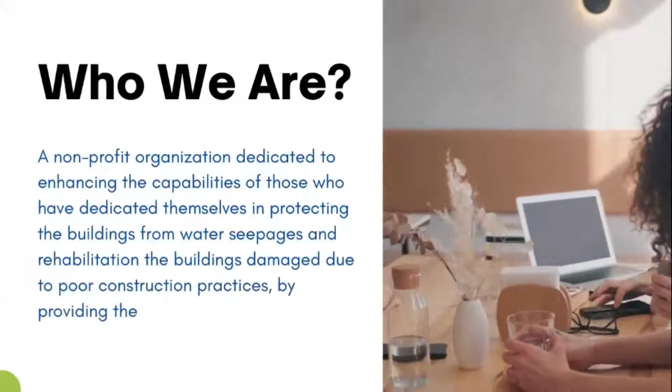Presenting to you all, Waterproofers Association of India. Introducing Waterproofers Association of India. We are a non-profit organization dedicated to enhancing the capabilities of those who have dedicated themselves in protecting the buildings from water seepages and rehabilitating the buildings damaged due to poor construction practices, by providing them a unified voice in the construction industry. Our mission is to make a credible national organization made up of the country's leading waterproofing, concrete repair, and rehabilitation, allied contractors, manufacturers, importers, consultants, and others which shall elevate the industry to a level of recognition and respect for one and all. This in turn shall facilitate focused growth of our industry in the years ahead.

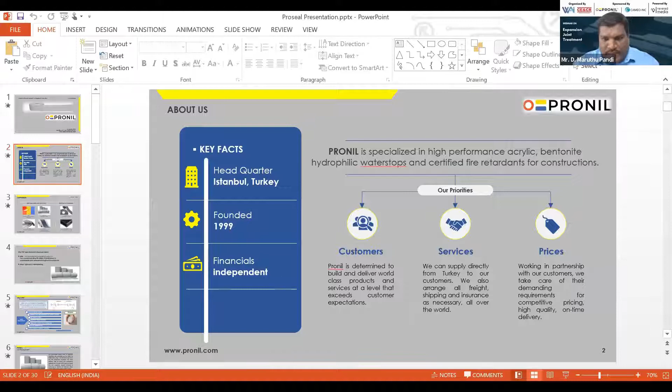Here you will see TPE pellets, which come in small pellets, and these pellets are converted into molten sheets in a machine to form the ProSeal expansion joint tapes. This tape is used in the expansion joint to accommodate movement as well as water tightness. I've taken a small piece and stretched it to a certain distance, so it prolongs and comes back to the original position. You can see here it was stretchable and comes to the original position to accommodate the movements.

It has good tear resistance, abrasion resistance, and resistance to lower and higher temperatures, colorability, and it is recyclable also. This TPE material has a high impact strength, is eco-friendly, resistant to very low temperatures, and possesses low compression. Low compression set means regaining the original position during expansion and contraction. It has excellent resistance to chemical and weathering. These are some of the very good properties involved in this TPE material.

Our product is called ProSeal. This is the product used in expansion joint systems, and it comes with perforations on the edges of the tapes. This acts as a better bonding with the adhesive systems.

Normally, the ideal adhesive used for fixing the expansion joint tape is epoxy adhesive or MS polymers. The perforations, the holes on the sides of the tapes, act as a rivet for the epoxy adhesive. For the first application, the second application will act as a rivet like that and have a better bonding on the substrate. It has a very good water pressure resistance of 5 bar, is very easy to apply on expansion joints, and is customizable according to customer requirements.

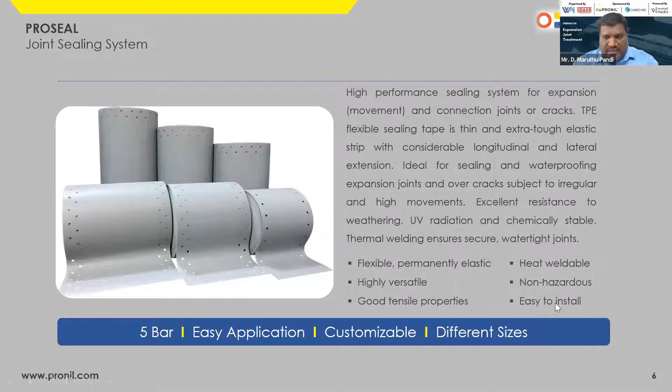There is a special treatment we do in manufacturing the ProSeal called plasma treatment. Plasma treatment is a surface treatment on these TPE tapes, done by machine. After a molten state, the surface of the tape is treated to have better bonding with the epoxy adhesive, forming a knurling texture phase. There should not be any dust, latents, or release agents or additives present. It should have a perfect, absolute bonding with the adhesive. This plasma treatment is required.

So plasma cleaning and activating the surface of the membrane gives better bonding with epoxy adhesives, other PU hybrid coatings, as well as MS polymers.

These are the technical properties of our expansion joint tape, TPE thermoplastic elastomer. The base chemical composition is a TPE-based elastomer, and the surface is knurling textured, which gives better bonding with other hybrid coatings, and it can be exposed to sunlight. It has a very good lateral and longitudinal strength of almost 4.7 to 4.8 MPa. Elongation is almost more than 500%, with very good tear resistance and a shore hardness of almost 70.

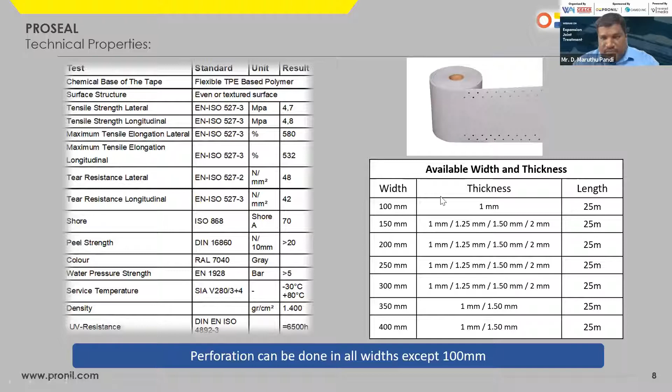We have various widths in the tape, like 100 mm, 150 mm, 200, 250 up until 400. Now we have started producing widths up to 700 mm also, with a thickness of 1 mm to 2 mm, and a length of 25 meters. We do perforations for all widths except the 100 mm. Perforation refers to the holes on the sides of the tape.

We have also done local testing with the Institute of Plastic Technology, which is a central government institute, and tested as per ASTM standards. It is certified by them, and this works well for Indian climatic conditions.

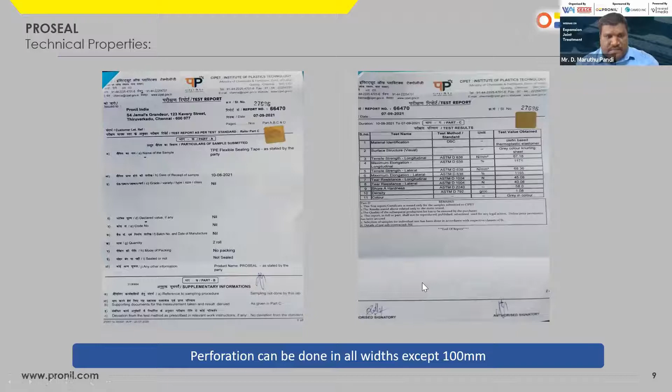We call it JSTO, joint sealing tape outdoor. ProSeal is an expansion joint tape product, available in plain as well as with a non-woven layer on both sides, like this. It's a TPE material of 70mm width with a total 120mm width including the non-woven on both sides, with a flexible zone at the center of 30mm. This is also customizable according to the required joint width - for 20mm or 25mm joints, we go with 120/70/30.

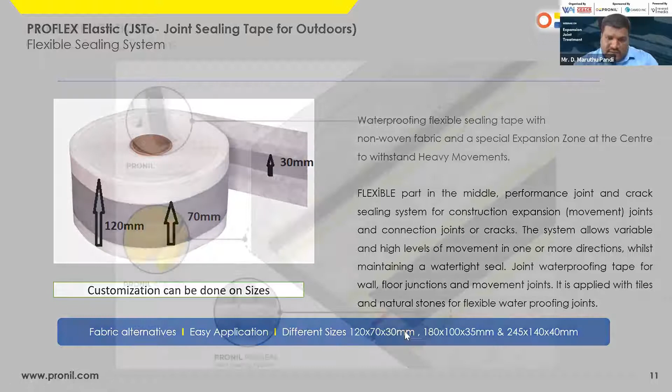If it's more than a 50mm joint, we go with a higher size of 180/100/35. The total width is 180, of which 100mm is the TPE coating and 35mm is the flexible zone. It also comes in a bigger size, 245 by 140 by 40mm.

This product, joint sealing tape outdoor, can also be used in some precast slabs, like precast movement slabs, where normally we put sealants like polysulfide or polyurethane. In those areas we can use these tapes to withstand movements and ensure water tightness.

For construction joints, normally we go with some acrylic swellable bars, and for sealing the construction joints exactly we can go with the TPE tapes.

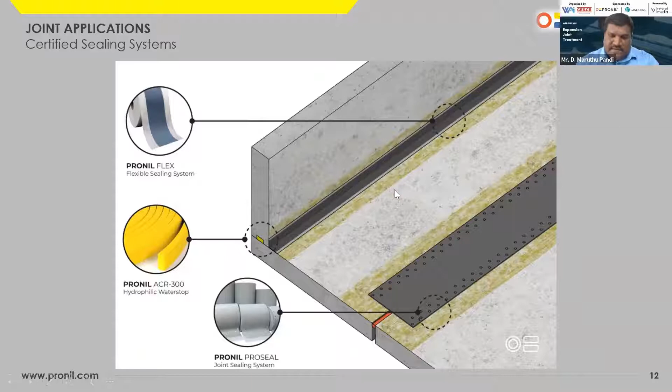This is also some of the USPs of the ProSeal tape. The product is used in combination with all construction systems - chemical resistance, UV resistant, very durable, European and Indian standard certified, with customer logo options which we do for some B2B companies. The drying time is also very fast once used with the epoxy adhesive, giving value addition and income stream.

I just want to explain - imagine an expansion joint of 20mm or 25mm. The selection of tape is very important. The tape selected has to be twice the width of the joint - that is mandatory. So if it's a 20 or 25mm joint, a 100mm tape has to be selected, or for a 50mm joint, a 150mm tape should be selected.

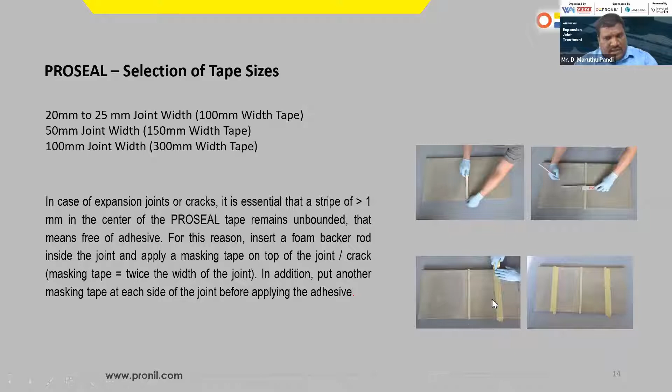So here's a small application process showing how to apply ProSeal. Here you can see the expansion joint was sealed with masking tape, so other material doesn't get into it. For a 20-25mm joint, we need a 100mm tape, so he will be putting masking tape before applying the epoxy adhesive.

Application methodology of ProSeal expansion joint tape on a horizontal area - imagine working on a podium slab, walkway, or pathway in a construction system. I'll show a small drawing. Consider a 50mm expansion joint in a podium slab where traffic or car parking will be present - for this 50mm joint, I'm selecting a 150mm tape.

This pink one represents the 150mm tape, which is fixed with epoxy adhesive. This epoxy adhesive has to be maintained at a thickness of 4mm on the substrate. Surface preparation, removing dust and laitance - all of this is mandatory for waterproofing applicators.

I'm just explaining how to fix the expansion joint tape onto the substrate. A 4mm epoxy adhesive layer is mandatory to fix the TPE tape, with a minimum of 20mm from the end of the tape to the concrete substrate. The first layer of epoxy adhesive should be 4mm, and then a second layer of 4mm should be applied, so it easily catches hold of the tape on the substrate.

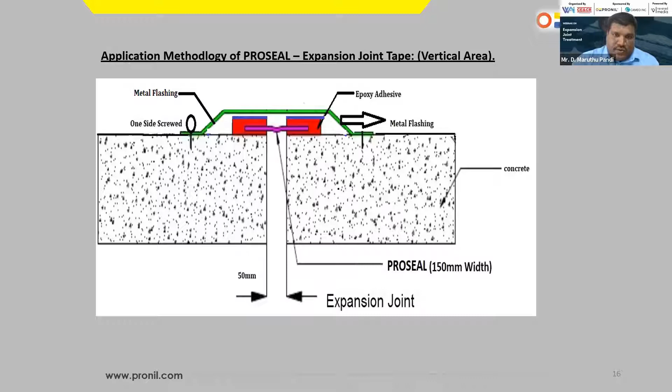And this is the application process. This is the joint - consider this as a joint - and he will be applying the epoxy adhesive of around 4 mm thickness on both sides. You can see here.

Do not apply adhesive on the center of the tape. In case of any dirt, the Pronil tape should be completely cleaned with a wet cloth. It should be free from dust and laitance. Do not use any solvent to clean the tape or the concrete surface.

Then apply the Pronil tape on the center. This is a joint sealing tape for outdoor use having non-woven fabric on both sides. This is also a TPE tape.

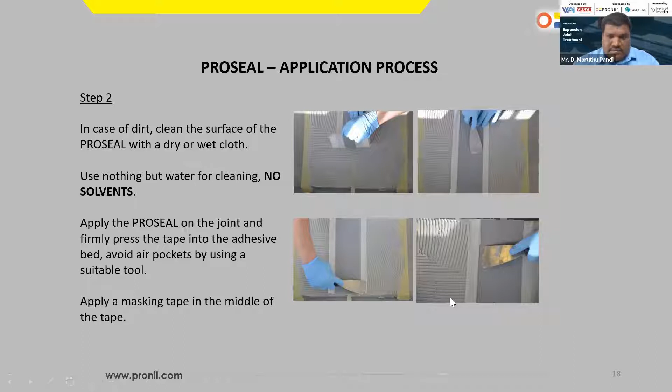There was a masking tape applied on the center of the expansion joint. Why is this required? This is the area where the expansion contraction happens, so we are not supposed to put epoxy adhesive on the center of the joint - we need the exact masking tape placed on top of it.

Then he will be applying the epoxy adhesive on both sides, as you can see here. Then at last, he will remove the center masking tape to accommodate the movements - remove the masking tape from the center of the Pronil, as well as both lateral masking tapes, some minutes after the application.

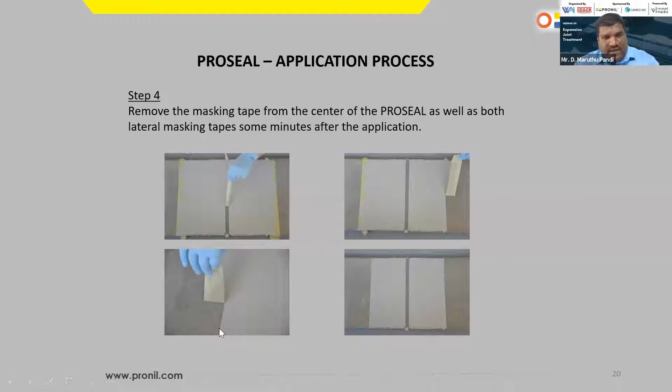After the application, the epoxy adhesive will have a knife effect - it will be sharper and may damage your fingers. So it has to be done in the wet stage itself. This epoxy adhesive has to be smoothened with some brushes or other tools.

This is a Leister machine, and for overlapping the Pronil expansion TPE tapes, a 340-degree temperature is required to bond two tapes. So a minimum of 100 mm overlap is required, though even 50 mm can be done. At minimum, 100 mm overlap is required to join two tapes.

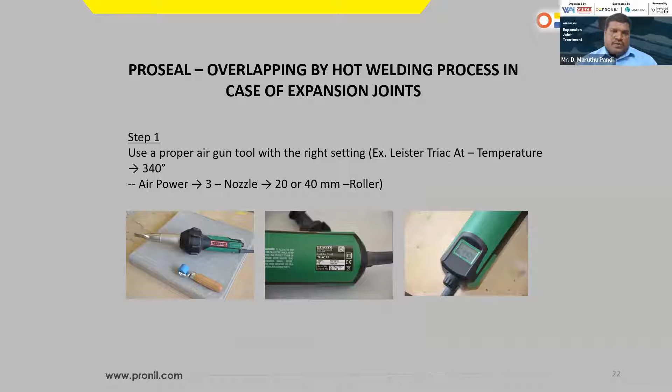When there is movement, we need a hot air gun to join two Pronil TPE tapes. If there is no movement in the joint, we can even use epoxy adhesives. And if there are any small micro movements, you can use epoxy adhesives for the overlaps.

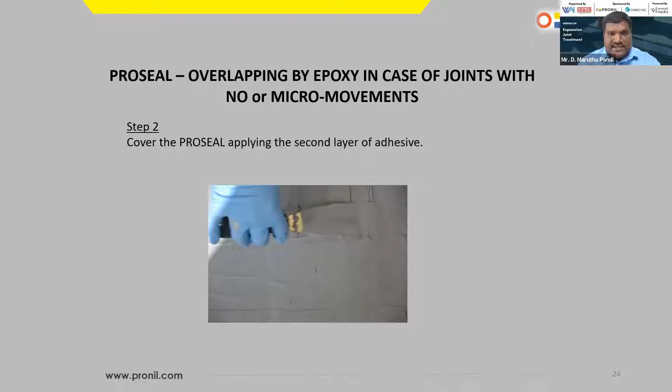And even if there is no movement at all, you can use adhesive for the entire top surface and protect that, so you can seal the joints. This will withstand very high water pressure, and this was applied on water reservoir tanks.

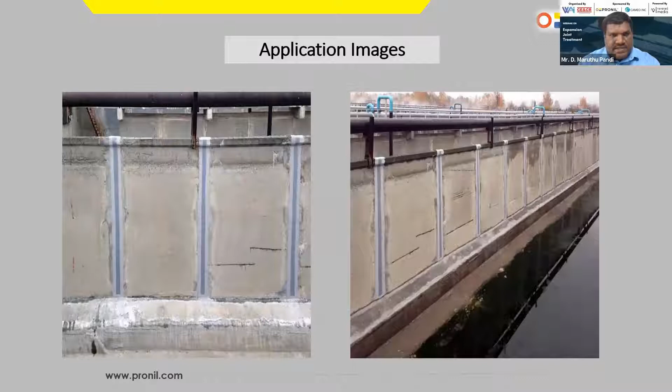Then they have just cleaned the surface of both edges, and they have chosen the right tape application of epoxy on both sides, putting the epoxy adhesive on both sides, on the bottom as well as on the top surface, to catch the tape from the surface for better bonding with the system.

And we do branding to some B2B companies in India as well as the Southeast Asia market. Our sole importer and super stockist for the South region is Greenfield Global, located in Bangalore. We have sufficient stocks of Pronil here in India, and we have a free trade warehousing zone in Chennai.

And Greenfield Global's directors were Mr. Ravi Shankar. Most WAI people know him, and even most of them know Mr. J.S. Prasad, who is also a member of WAI. And myself, Maruthu Pandi, I'll be taking care of India and the Southeast Asia market for sales and marketing, both for sales as well as the technical part.

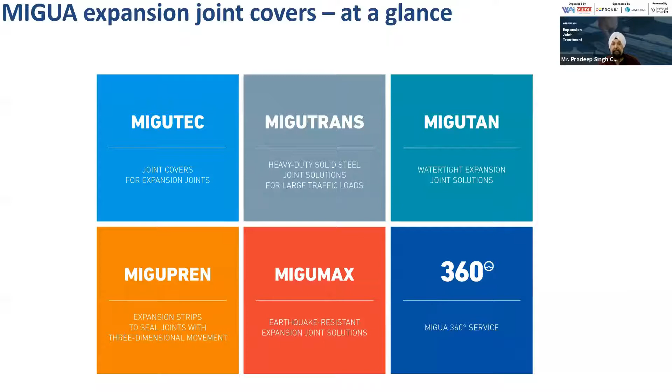So Migutec, I'll just brief you about Migutec. Migutec is a contraction expansion joint system, like you can see. You can see the ESF 10AL at the top, which is generally used between stones and tiles.

But we have an all-aluminum model. It's full aluminum, there's no EPDM in the middle. ESF 8 has EPDM, so that's a model which everybody has, but like ESF 10AL, nobody has that. The EPDM will not come out of that.

Then we have FLT 21, FE 35 here in this. As you can see the movement in the joint here. The gasket used here is UV resistant. All our competitors' gaskets are not UV resistant. The temperature variation it can take is minus 30 degrees to 120 degrees Celsius, and it can take a load of 300 kilonewtons on top. So we can even use it in parking lots.

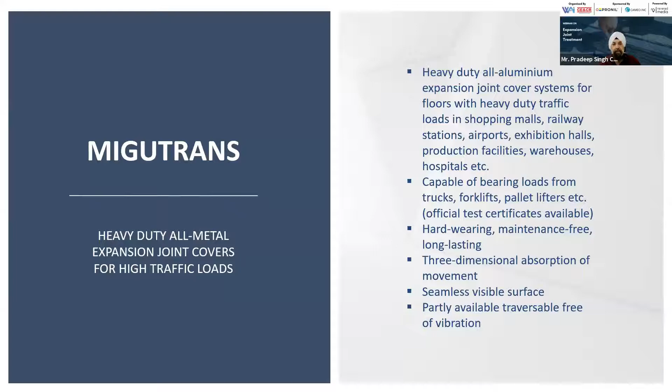Migutrans is our heavy duty expansion joint system. We calculate the loading capacity, the load required on top, and we suggest models. You can see the movement of the system of an expansion joint here. It's a Migutrans system which is for heavy duty loads.

Now Migutan is our prized, I'll say, watertight system which we did. The first job that we did was the Oberoi Gurgaon, where somebody else had installed a system when it was constructed, and we changed it to Migutan series 4 years back. Just a week back, we've been awarded 300 running meters of Migutan at Amrita Hospital, Faridabad.

So the model on top, FP 90 NI lF, is what it looks like. It's a complete watertight system. To make it watertight, it's not just to have it flat on the surface. You need to have all transition profiles to make it watertight, or it will never be watertight. The water will seep in from somewhere or the other.

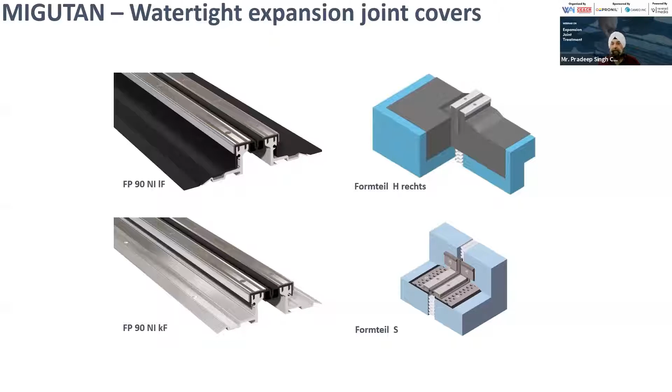So this is how it looks, and this is how it is installed, if you can see. The gasket and the sheet are all in one piece. It comes from the factory, custom made as per measurement from the site, and it is installed.

Migumax is our range for large expansion joints. This is our flagship model, which we used at Indira Gandhi Hospital also. And this is how it moves during a seismic activity.

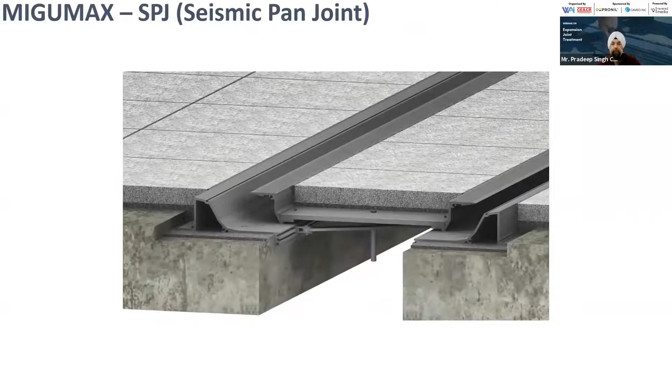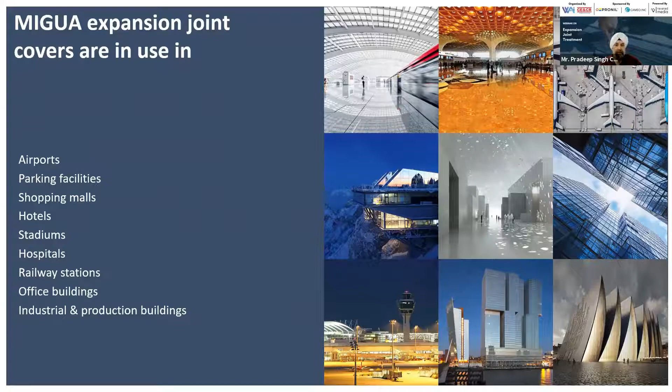Now, Migua expansion is used at airports, parking facilities, shopping malls, all large buildings that you can think of, railway stations, airports. Our current credentials abroad include the Jeddah Airport, the mosque in Saudi Arabia, then Abu Dhabi Airport, the mosque at Algeria, and the Dubai Mall extension.

These are our clients where we've already completed a few jobs, and we are still doing more of them with them in India. Now I'll come to options for dealing with expansion joints.

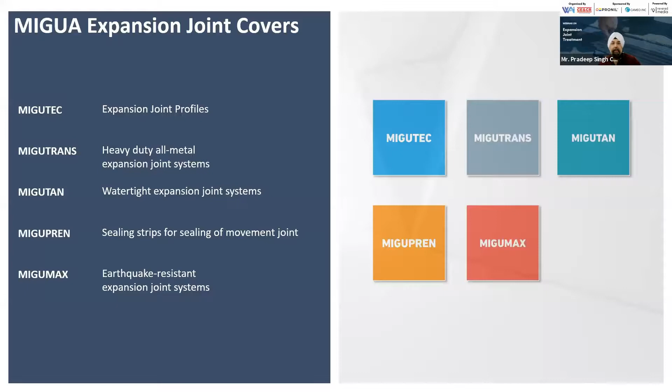What are the advantages? When an expansion joint inquiry is given to us, the first thing we ask is what kind of movement are you looking at. Nobody talks about movement in India, whereas movement is very, very important.

When a structural engineer conceives an expansion joint or movement joint, he has to think how much movement a building can take. So if it's a 100mm joint, that means the expansion joint will move at least 50mm, which we call 100% movement. Plus minus 50mm is always 100% movement. So that's one thing we always ask.

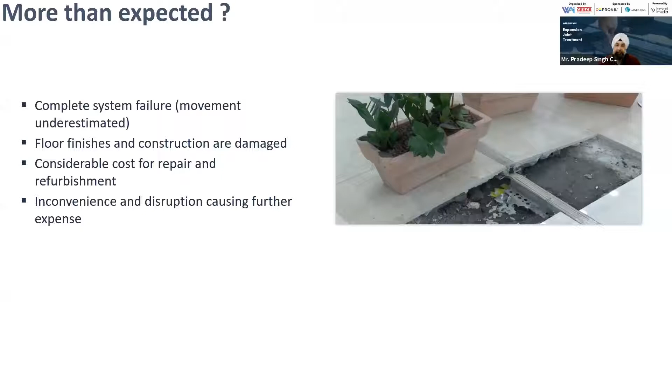And secondly, the most important part is what load are we going to put on the system.

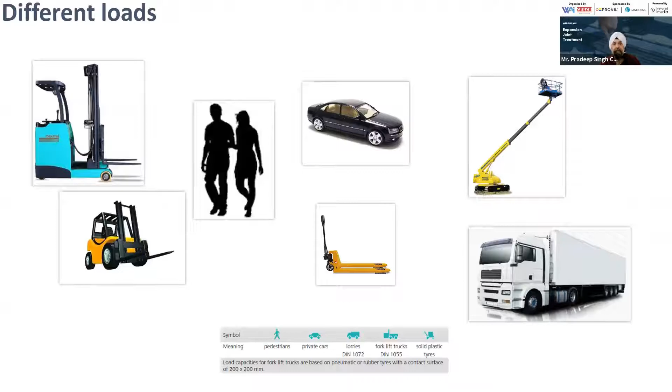We calculate loads in the factory on all our systems, and all our technical data sheets have the loads defined. As you can see in the sheet below, it lists pedestrian, private cars, lorries, forklift trucks, and solid plastics. All of these will have a sheet with the load it can take, whether for pedestrian or private car use. So if the load is not correct, this is what happens to a surface.

Now we'll come to our watertight systems. That is what we are here for.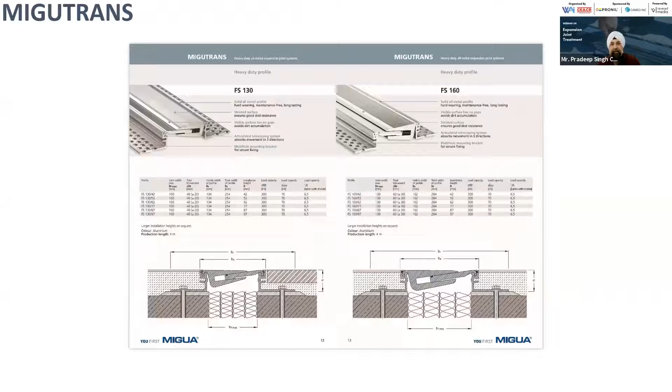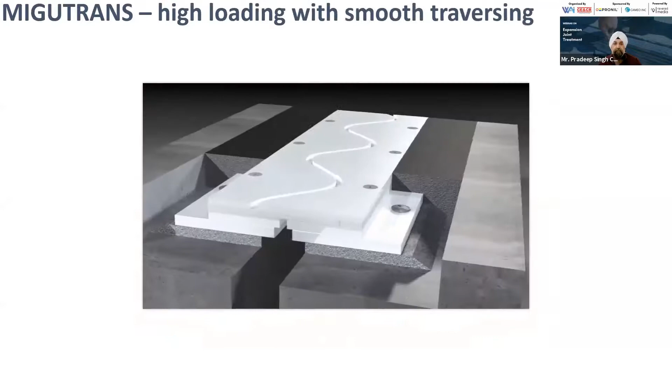These are another few models from Migutrans, and this is how it moves during contraction and expansion.

We have retrofit models as well. Sometimes we come across sites where they've already constructed and not used an expansion joint but left the place for it, and they need models. We have them, but we have to import because we don't keep them in stock, since we only get one order for this once a year. But the loading capacity really reduces if we use this kind of model.

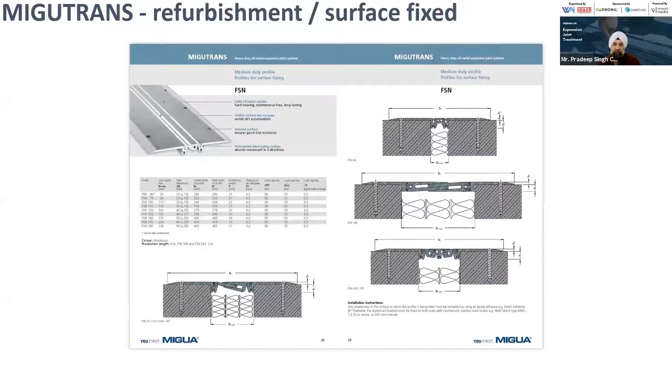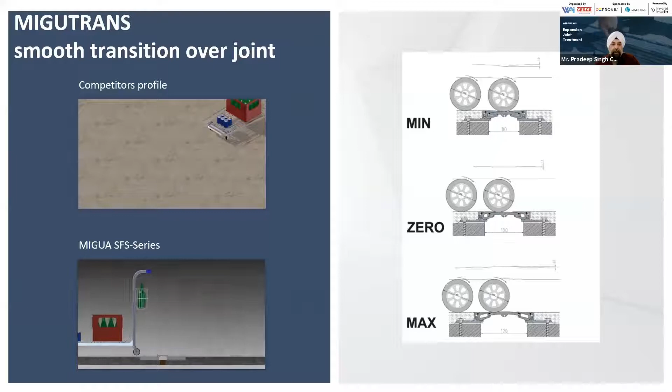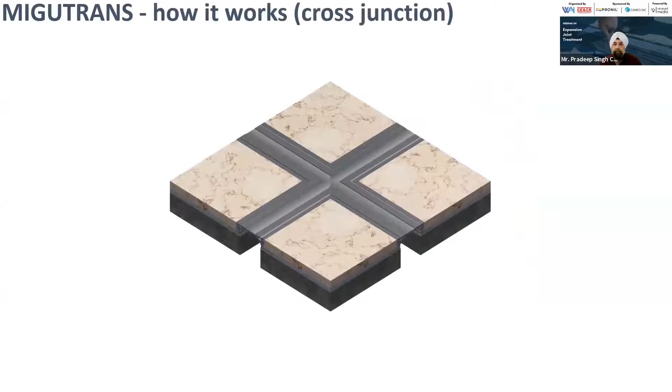We also have vertical movement in all our models. You'll see here how it moves. This is how actually all the expansion joints move. This is very necessary to have this kind of movement as well. So if it's a cross junction, our joints will also move the way it is moving here.

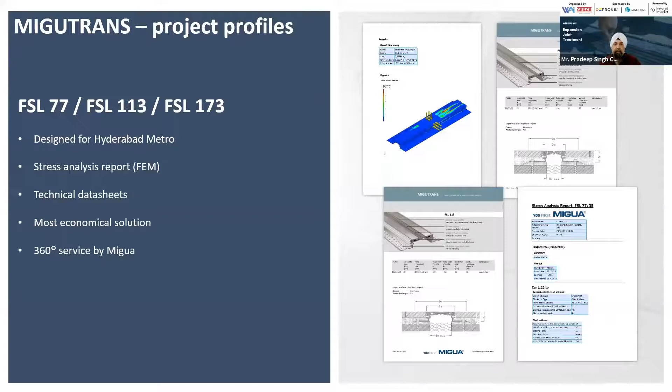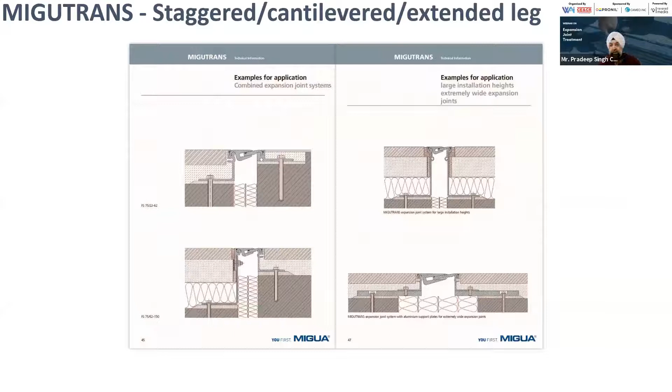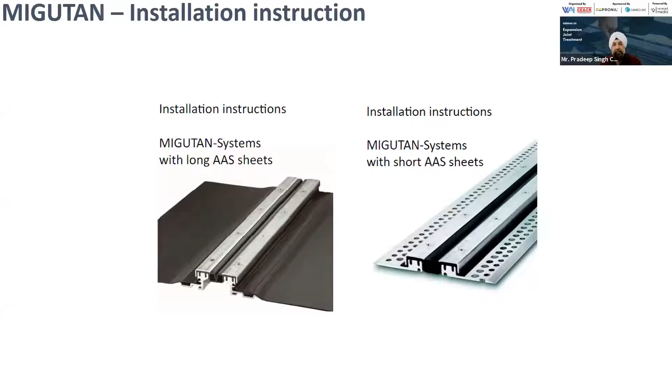It's a single piece site for Migutan. You can see this has been supplied in one piece, as it is. I'm talking about the central gasket and the AAS sheet, not the aluminum part. That comes in 4 meter lengths.

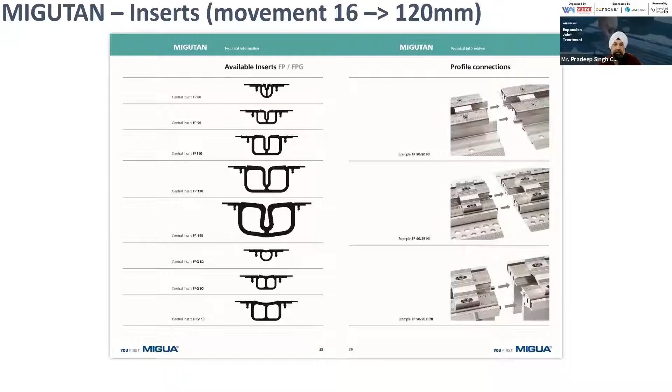These are the various gaskets we use depending on the movement required. If you require 50% movement or 100% movement, they change the insert. Then we have transition profiles for all the models to make it watertight. Without transition profiles, a system can never be watertight.

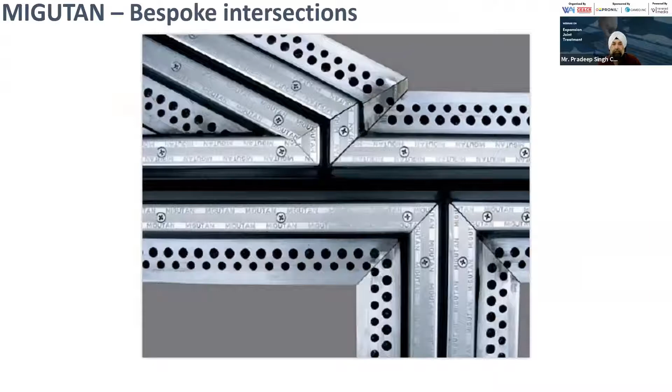So we have this kind of profiles also. You can see L shape, finishing there, finishing there. It has to finish in a system. The system has to finish like this, otherwise it will not be watertight. As you see on the right, again we have long arms for this.

If you're making a road and your mother slab is at the bottom, we try to give you water tightness, but the treatment always has to be done on the mother slab. So we've done the treatment on the mother slab and installed our system right on top. So there is movement and there is water tightness.

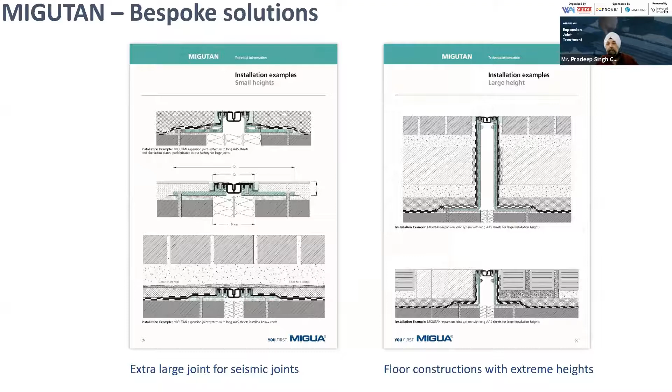And you can take a fire brigade over this. These models are very tough.

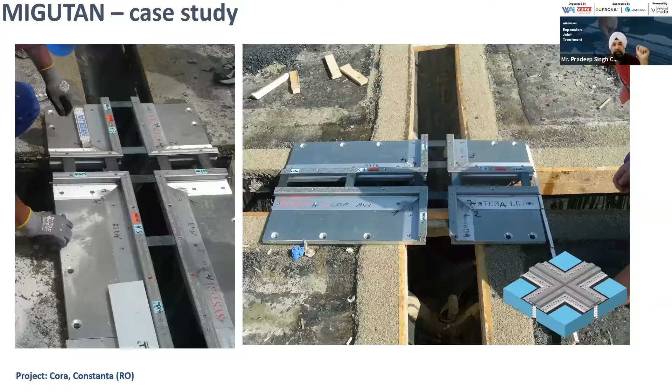So this is a case study, a project in Constanta. This is the terrace area where they have trucks coming over it to unload their goods. So that is what it looked like. And this is the shape of the system that has to be used. This is being installed, the plate. There it is. That is one.

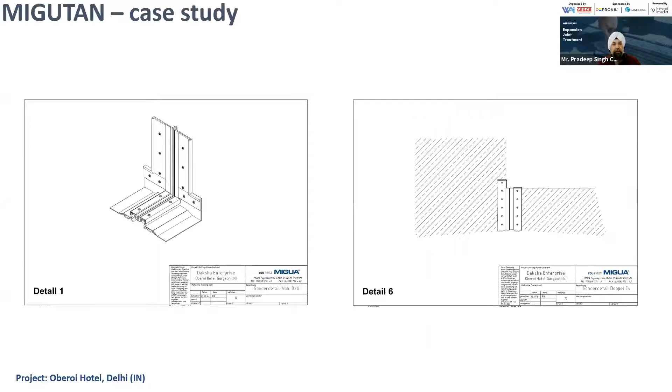We also have a cover plate on the top for this model, so that the gasket does not get damaged. So this model has been installed with the cover plate on top.

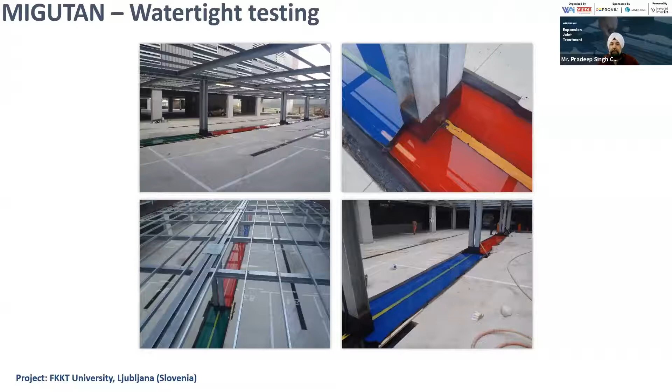We give you a ponding test as well. As you can see, we put red color in the water and blue color in the water to see if there are any leakages, and we leave this water for a week, 10 days to check if there is any water leakage or not.

A few installations being done, a few installed sites.

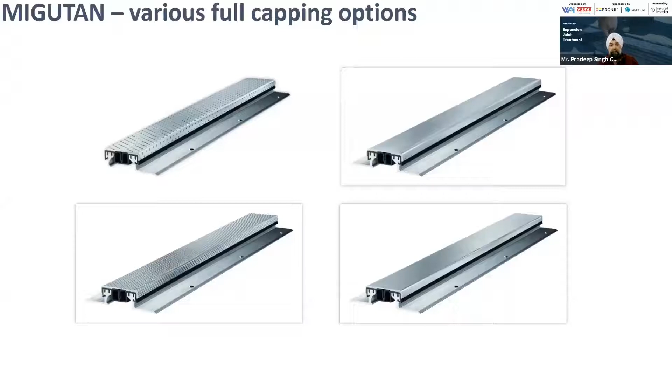So this is the cover plate I'm talking about that we provide in case somebody wants it. This is an SS cover plate on top of a Migutan series.

So Migumax is our big, large seismic joint movement system. As you can see, we have systems which probably everybody has, with the gasket on the side, and you can put stone in the middle.

We have this model called SPJ, which has been developed now, and we are using at Indira Gandhi Hospital, which does not have any flange, which does not have any gasket or no sealant has to be put into that.

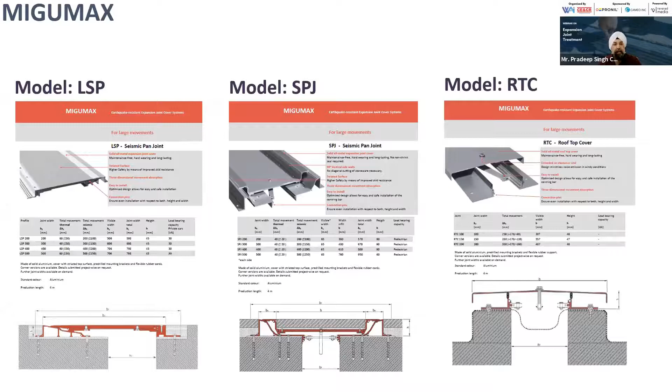Then we have the rooftop model as well. And we have a parking model called LSP. These are again a few more models of our Migumax.

The Red Dot Award we got for the vertical model, as you can see, that's an expansion joint which has been installed. You can only see the side two metal pieces, and the center part is exactly the same finish that you have on the side, both sides. So this is how it is.

The floor model is SPJ at the bottom, and the wall model, the vertical model, is WSP, which has got the same finish on the sides. It looks like one system running down.

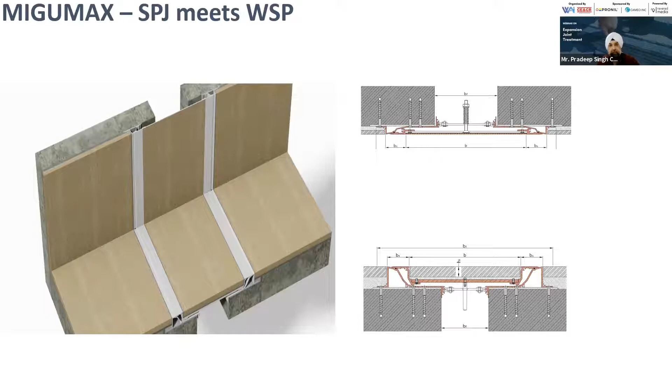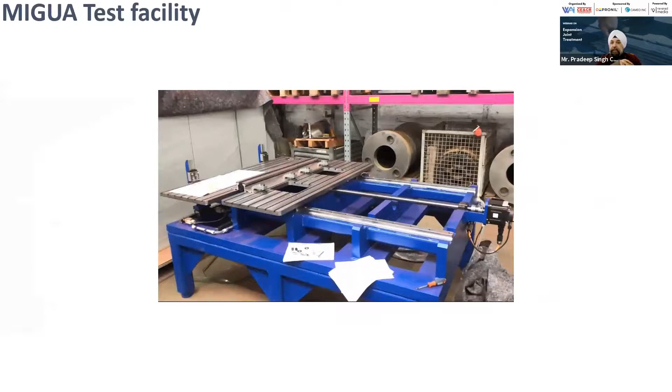We have this machinery to do ASTM 1399 test, which is a must for any expansion joint system. If a 1399 test is not there, that profile is not suitable for an expansion joint, because after the movement, you don't know whether it's going to come back or not. So a 500 cycle test is a must. So ASTM 1399 is going to be very soon incorporated in all the government projects.

We've already made a few presentations, and they have given our approval. So probably the next DSR that you find, 1399 is going to be incorporated. And most of the projects now, ASTM 1399 is going to be coming, and with this machinery we'll have to get this certification done of ASTM 1399.

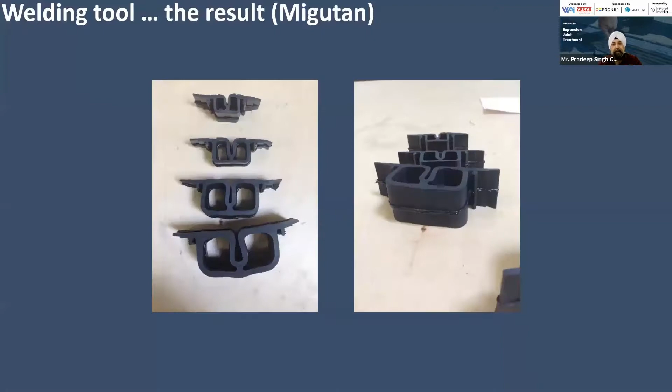Then for all our gaskets and other systems, we have these welding systems where we weld in-house. We also do these at site, hot welded. All these gaskets are welded in case it's a long gasket and you have to do it at site, as you can see.

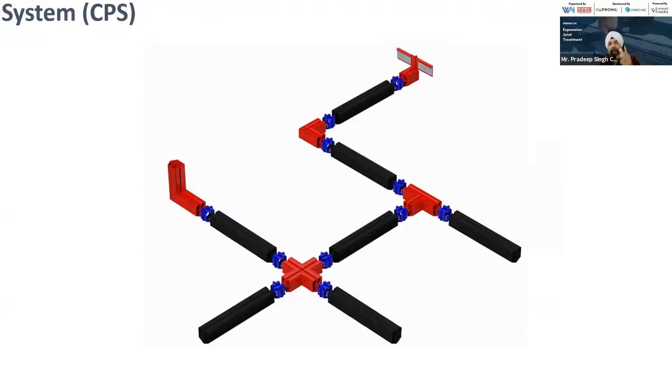Then this is a gasket where we have interconnecting profiles. We have end profiles to make it watertight again. Without this, a system can never be watertight, because we cannot achieve that using epoxy or anything, as it can come up. Since this is interconnected, the water will never leak in. So this is how it looks, and these are all factory made profiles.

This gasket is available with almost all our competitors, but the Germans have done some innovation here. They've made a tool for this system that we use to squeeze this profile from the top, because when we apply PU or epoxy on the sides and hammer it inside, the epoxy or PU oozes out from the sides and the water tightness is lost. So we squeeze it, apply the PU or epoxy, push it inside, and release the tool. It comes back to its place. There is no hammering, which makes the bonding much better than hammering it from the top.

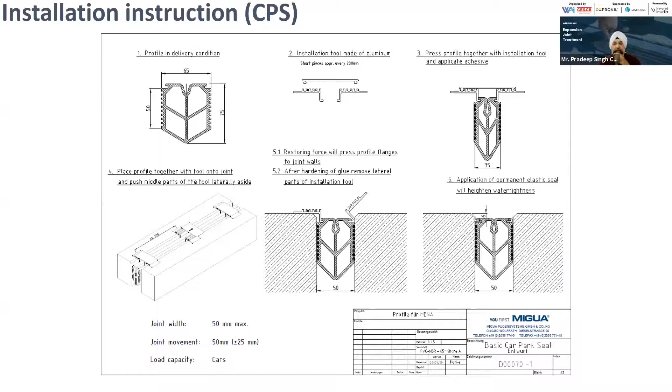Migupren is another system that we have installed at Taj Vivanta Bhopal. We've also done it at Brookfield; I'll talk about that quickly. Our Migupren has also been tested on X, Y, and Z axis, which is a must for any expansion joint system. We call it a system because if it does not move on the X, Y, or Z axis, it is not a system.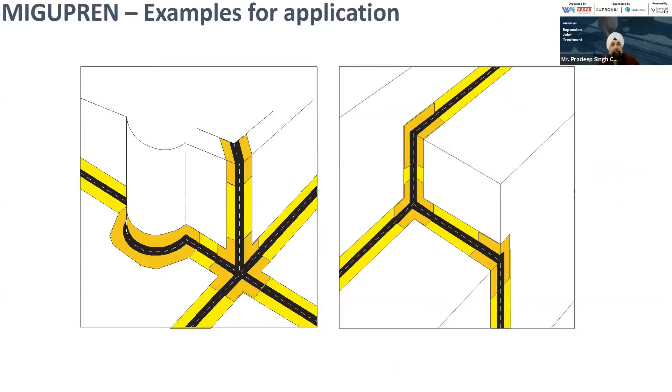You can make it in any kind that you want. This is how we install it generally. We sandwich it and put an aluminium sheet on top. We don't screw it from any side; we just leave that aluminum sheet and sandwich it in between. The black part is what moves. We've even put it in soft landscape areas where you can put mud and grow grass on top, with no problem and no leakage at all.

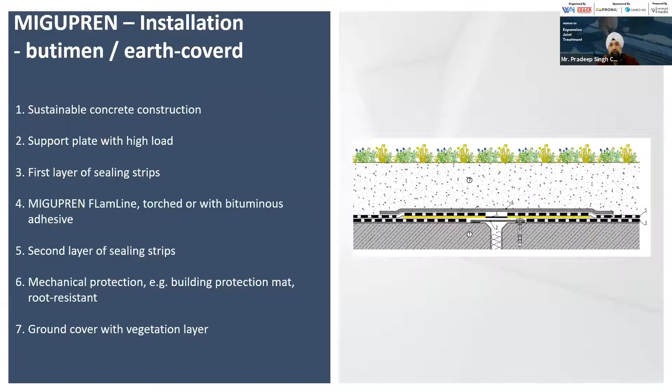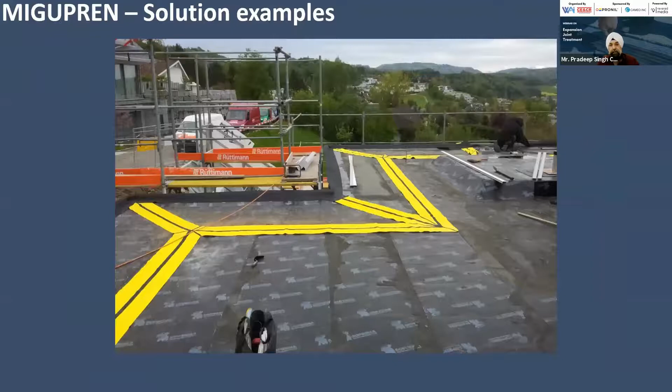So the drawing is made first. Once we measure the size, we send it to Germany, they make the drawing, take our sign off, and then supply it. This is how it's done, and this is how it looks once we install it. This is again a rooftop being done, with a floor below this.

Now this one on the left is a combination of MIGUPREN and MIGUTAN, where a MIGUPREN series has been used below and a MIGUTAN series has been used on top. This is how we hot weld it. In case it gets damaged on the way, we need these machines to hot weld it at site.

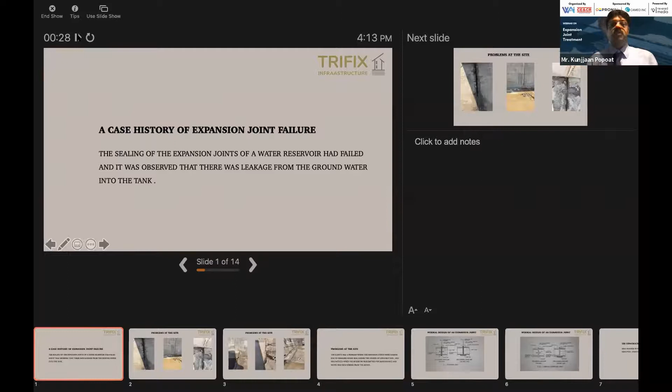From these photographs, we can see that the expansion joint had totally failed and water was leaking from all the sides in the expansion joint. These images which you are seeing are after the water was removed from the tank, and it is in a very dry area.

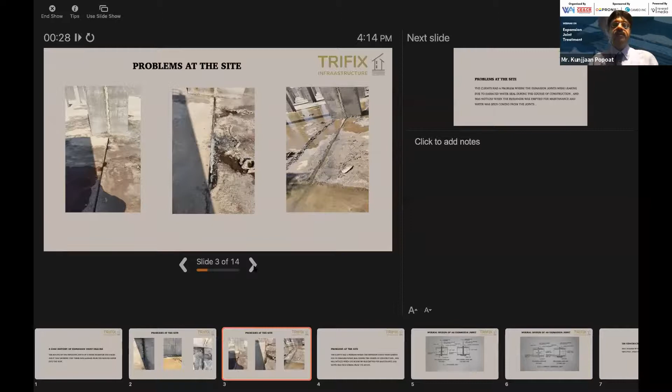The problem at this site was the expansion joints were leaking due to the damaged water seal during the course of construction, and it was noticed when the reservoir was emptied for maintenance and water was seen coming from the joints.

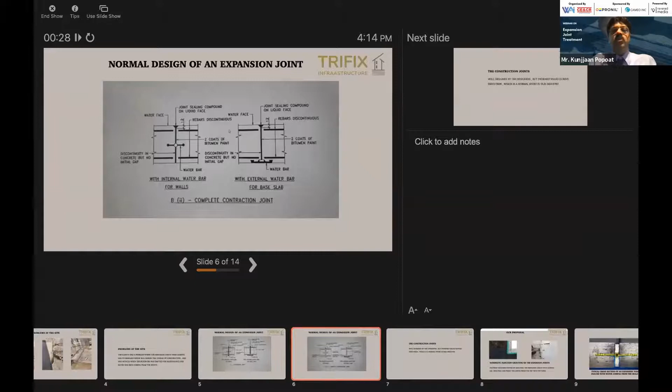These joints were properly designed, but during the course of construction it had got damaged, which is quite normal in our industry. Maybe there was some mishandling of concrete while laying, and the expansion joint had failed. So the clients had called us to help them in solving this problem.

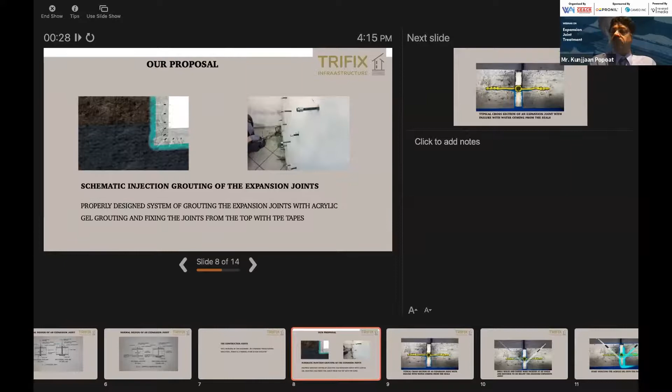After the study of the site and everything, we came up with this proposal: doing a schematic injection grouting of the expansion joints. This time the grouting was from the top of the structure instead of from the bottom of the structure, which is what usually is done in expansion joints. This is a typical cross section of an expansion joint with failure and water coming from the seals.

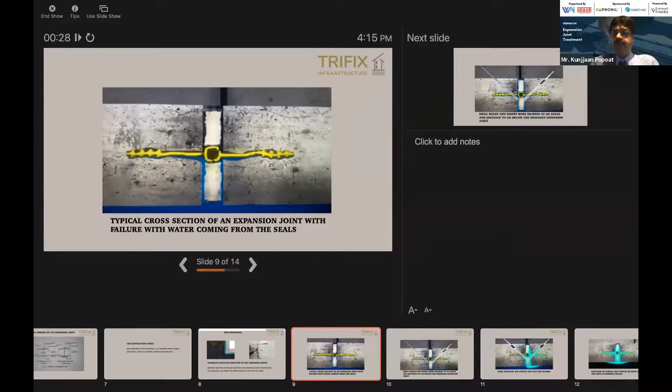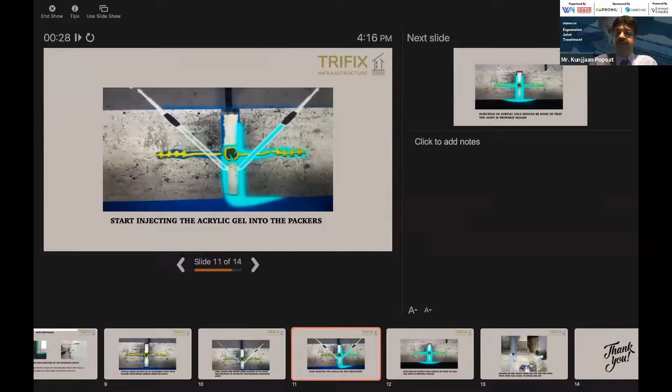So what we proposed was to drill the hole and insert the packers beyond the seal, designed at such an angle that the packers would go beyond the seal. Then we slowly started injecting acrylic gel into the packers, and we went on doing it so that it forms a seal below the expansion joint.

The expansion joint was done in a perfect way, and after that we put the tapes on top of the expansion joint so that the water which is there in the reservoir doesn't leak through the expansion joints.

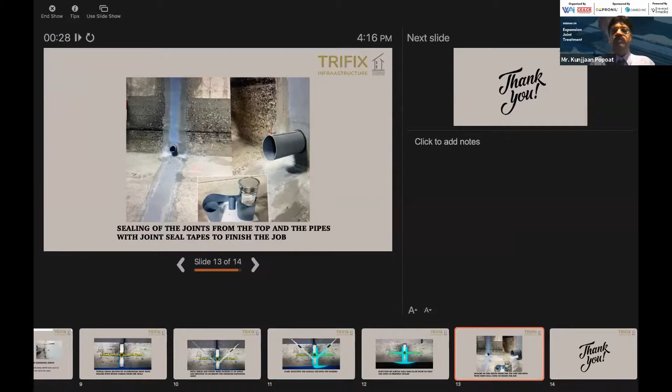What injections we have done is basically to stop the water which is coming from the ground level into the tanks, and in fact the tank water needs to be pure water for some refinery works. Thank you.

Actually, I have come in place of a person who had just dropped out, so I said let me give a small presentation on how injection grouting can help in expansion joints. Such expansion joints also we get in podiums, which can be treated with acrylic gel systems or flexible PU systems.

Like in podiums where expansion joints are there, which are under the gardens and all, which cannot be opened up and we have to do it from the bottom. So this is a typical way where we can do the expansion joints from the bottom also and from the top also.